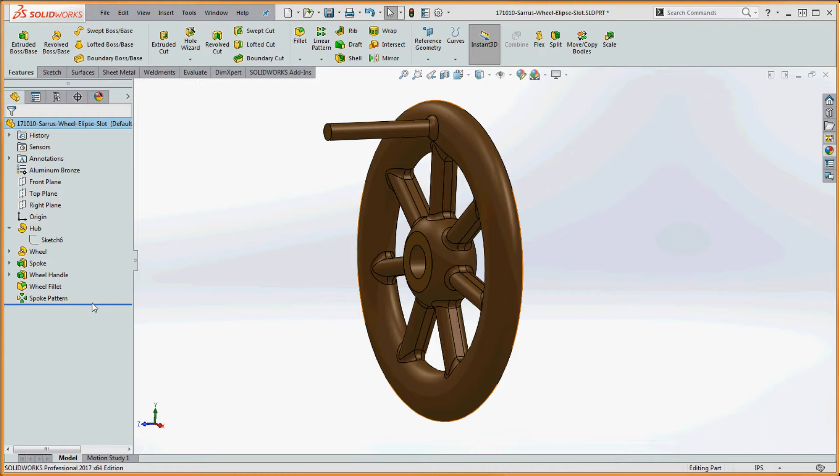So we're going to first start with the hub. Let's take a rollback bar and roll this back a little bit. You can see what we're going to be accomplishing. And if we go to the very top, actually, we're going to be choosing aluminum bronze for this as a material because it kind of looks pretty. And the hub's going to be this feature over here, this sketch over here. We're just going to revolve it around that center line right in the right plane.

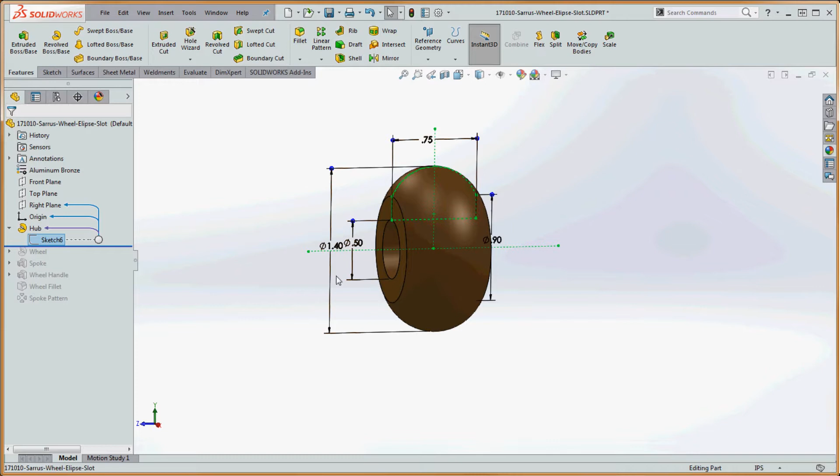So we're going to go ahead and revolve that around, and what that's going to do is provide us with a 1/2 inch hole. It's going to be 3/4 of an inch wide, and then the top is going to be variable. We can make it 1.3, 1.4, but it kind of gives it a round look to it. So if we rebuild that, the next one's going to be a wheel.

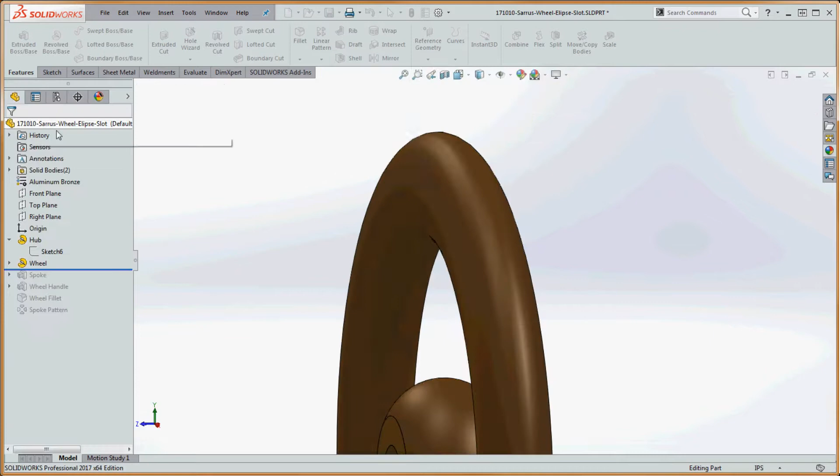So if we look at the profile of the wheel and go to the section tool and cut that in half, let's go ahead and cut it this way. What we're going to be doing is we're going to be applying an ellipse in here. That's going to help define that. So let's go ahead and get out of that and take a look at the sketch that drives that. If we right click it and go to that sketch, very basic.

It's kind of like a circle, and we're going to go to that center line that we have in the middle of this and provide a diameter on that, and that's going to give us a diameter of the donut, the torus, as we'll oftentimes call it. And this is defined by an ellipse, and if you go up to the sketch tab on Command Manager, we're looking at this element in here.

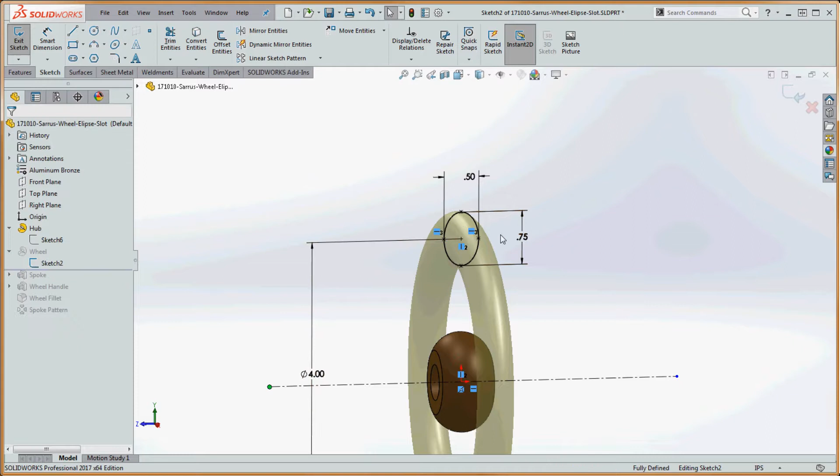So the way this works is you define the center of that ellipse, you sketch it out in one direction, you sketch it out in the other direction, and you apply various dimensions on it. So the 3/4 inch dimension, which means it's half as much longer than the 1/2 inch dimension here. Plus you have to do something extra, so it gives you these points in here. You have to define these points too before it comes fully defined. So these 2 points are going to be horizontal to each other. And that'll define that ellipse, and we're just going to go ahead and rotate that around.

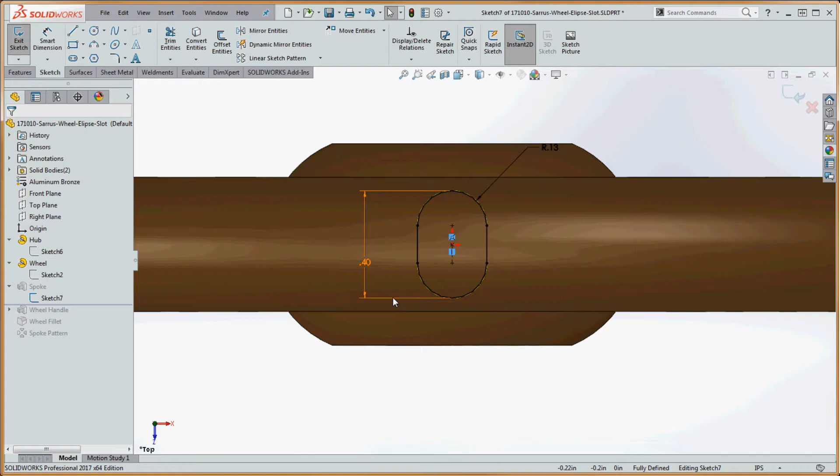The next one is going to be the spoke. And this will be kind of interesting. What we're going to be using here is the slot tool. So if we right click on sketch 7 and go normal to that and see what that looks like, we're going to be sketching out a line in here, and on that line there's going to be an offset for the edge of that slot. We'll talk about that a little bit more, but the length of the slot is going to be 0.4 inches, and the radius of this portion of the slot up here is going to be 0.13 inches.

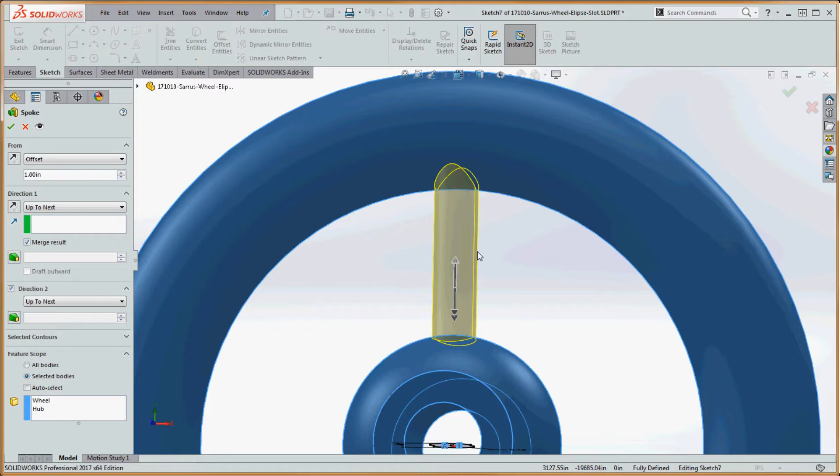And then one interesting thing we're going to be doing is when we go to the feature on that one, which is going to be an extrude, we're going to do an offset in that. So the first offset is going to be right here in the middle, and it's going to be 1 inch. So now we have kind of a virtual sketch in here. And we're going to be telling it to go up to next, which is going to be the torus up here. And then direction number 2 is going to be up to next down here too. So that virtual sketch is going to go up to that surface up here and then down to this surface.

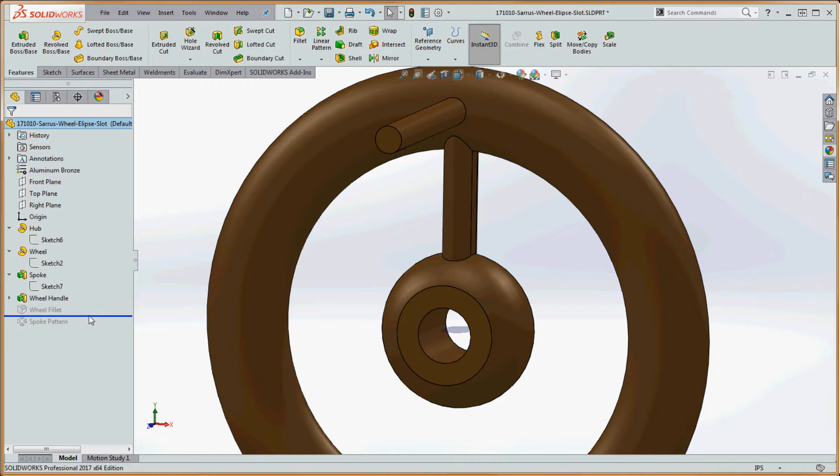Now we're going to do the wheel handle, and that's pretty basic. That just comes out like that. We're going to be doing that for the front plane, and then we're going to put in fillets around that, and then finally we're going to end this with a circular pattern. We're going to do 6 of these spokes with the fillets, and we're going to make that go all the way around our wheel.

Okay, so let's start with the hub. Let's take our rollback bar and roll that all the way back as far as we can go. We can't go any further than the origin, so we can delete all the stuff that we like.

We're going to be sketching on the right plane. We'll do this pretty quick, going normal to that plane, and put in some lines.

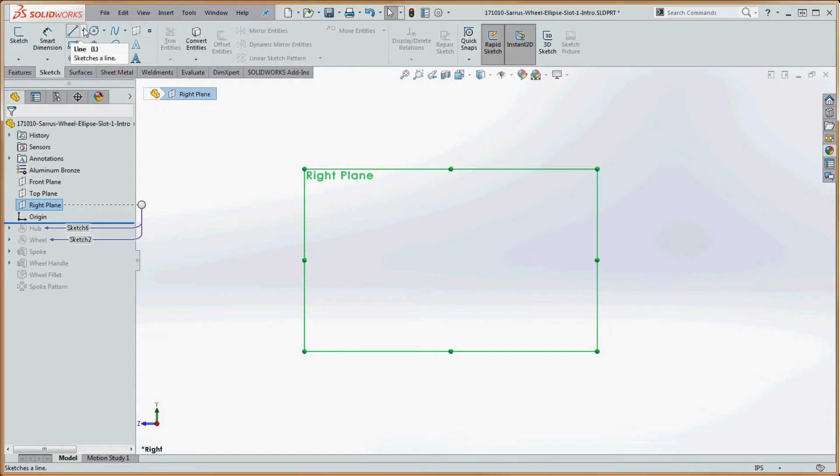Go to the sketch tab on the Command Manager. For the center line, we're going to sketch it horizontally and then vertically. We'll choose the midpoint of that center line and make a coincident relationship with the origin, then sketch that out a little bit.

This time we're going to make a center line and just have it go up. We're going to put all of our model geometry on top here. So the first thing we want to do is put a line in here.

There's another way of doing this line too. Since we're going to be providing a midpoint relationship here, let's go ahead and use a midpoint line and sketch that out. Sometimes it's hard to pick up that horizontal relationship, but yeah, there it goes.

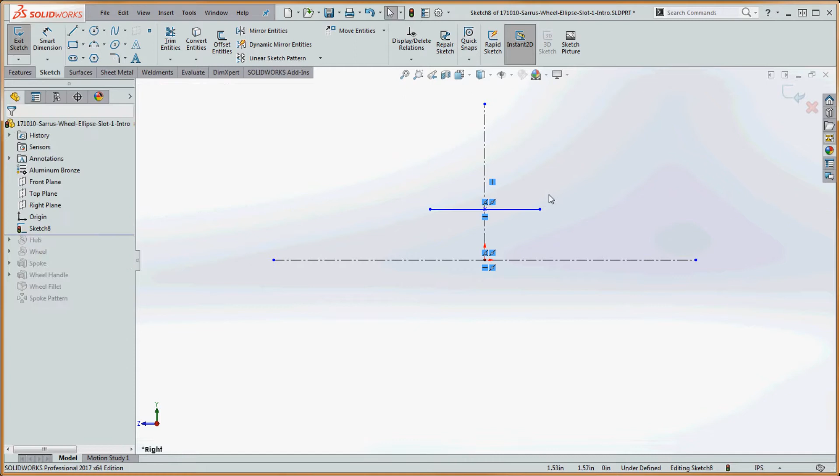We're going to provide a dimension between that line and the center line, and make that a half inch. Right now it's like 2 inches, but 0.5 is going to scale the lines we have in here, which actually makes that turn out okay.

Then we're going to provide a width, so we'll put a 3/4 inch dimension on that. That kind of gives us an idea of what this is going to look like.

We're going to put some connected lines and an arc across the top, another connected line down here, and this is going to be the void where the hole is going to be. It's a little bit of a different way of thinking about this.

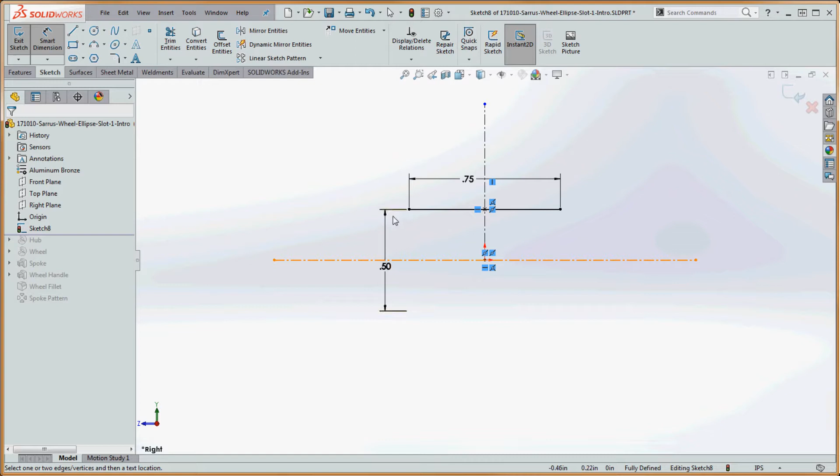But if you think about this dimension, if we click on it, go over here to Leaders. Remember, we can go back and forth between radius and diameter, and right here in this situation, this is actually going to be the diameter dimension of that hole we're going to create.

Green check mark. Let's go ahead and put a line in here and maybe go up a little bit. Let's go ahead and take that line.

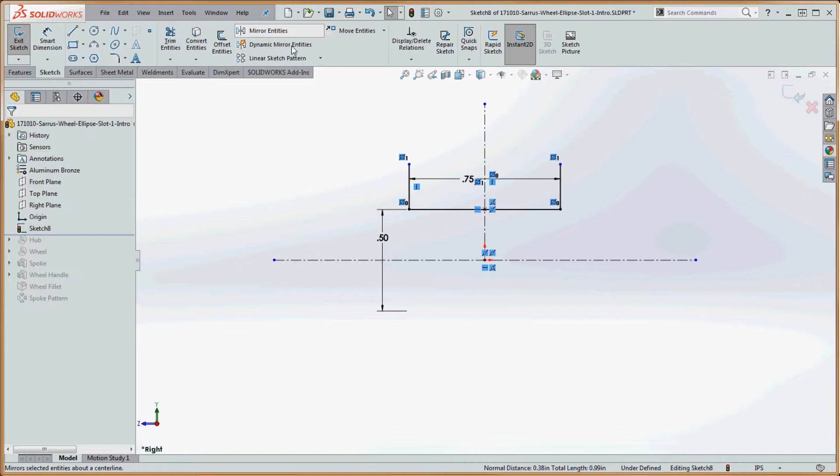We're going to mirror it to the other side. So click those two items, the center line and that line, and it's going to go to the other side. Let's go ahead and put an arc all the way across.

Now this time we're going to put a dimension between that arc and this line, and go to diameter down here, or we can go to radius. Let's go to diameter and just drop that in there at an arbitrary value.

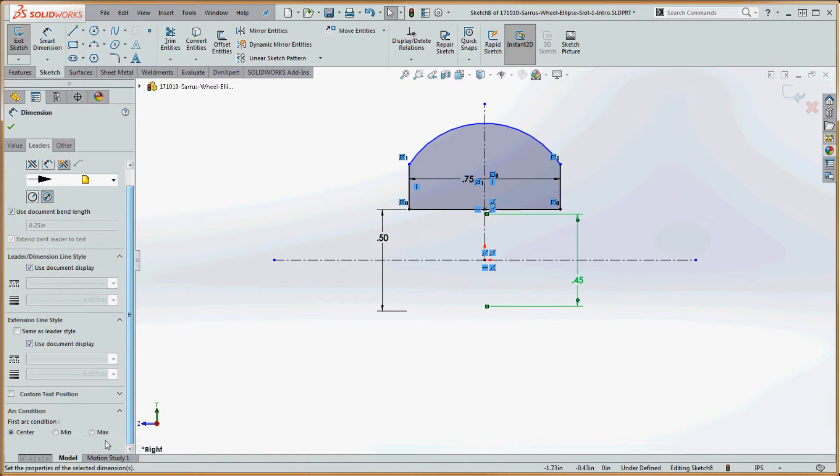We're going to click on it, go back to Leaders on that, and make that a maximum, going from the very top of the arc down to the bottom, so it's going to be the diameter of that. Let's go ahead and make that maybe 1.4.

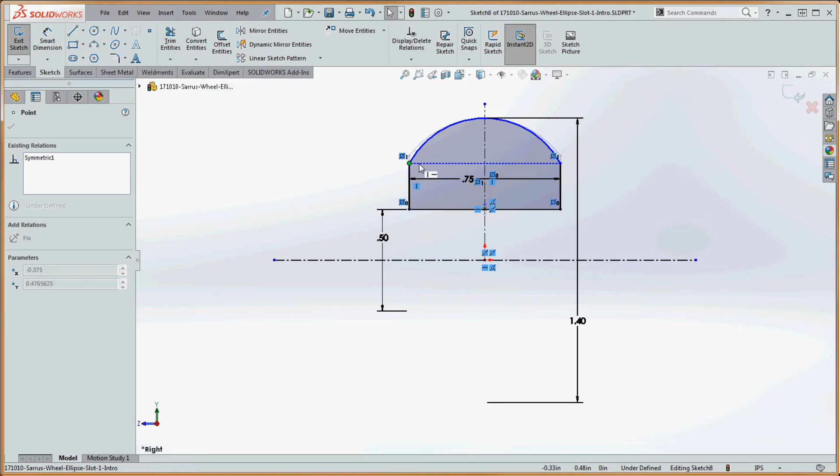So let's go ahead and go to Smart Dimension. Let's go ahead and dimension that at maybe 0.2, kind of making that an exaggerated arc in here.

Let's go ahead and go right to our features. If we go to Feature tab, Revolved Boss Base, I think it's almost ready to go. We're going to go 360 degrees.

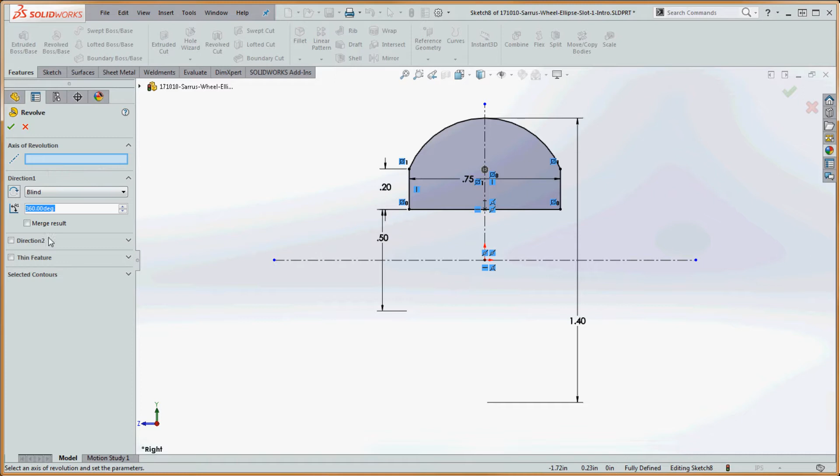We're going to select all the default settings. What I was looking for here is the axis of revolution. If we click on that, now you can see what that's going to look like.

And green check mark, and now we have our hub in place. So let's go ahead and rename that from Revolve 1. Let's go ahead and call that our hub.

Now, we already have a feature in here called hub. So here's a little trick. It's not going to let us do that. It's not going to let us name it the same name. But if you type in hub and maybe space a couple times, now we get it.

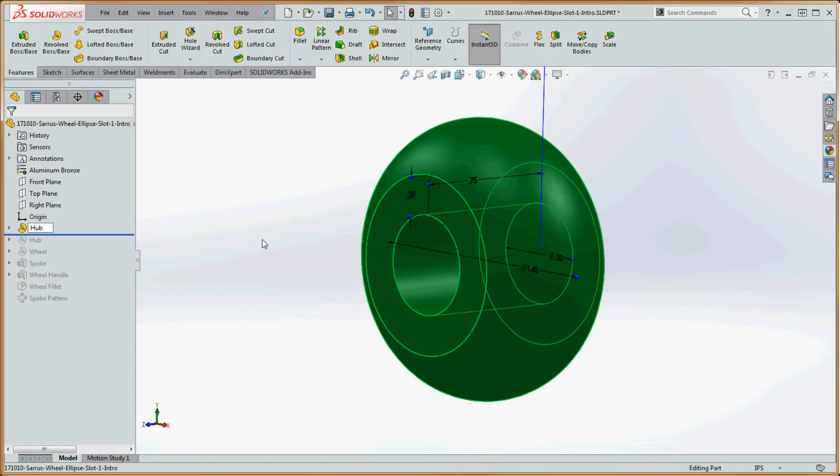Okay, so let's continue on. Let's go ahead and use the ellipse. We're going to put in the wheel portion of this, or the torus, as it might be called.

So let's go ahead and choose the right plane. Let's go ahead and make that normal to. If we were to right-click on it, we have that normal to function in here. So we can see where we're going to be sketching.

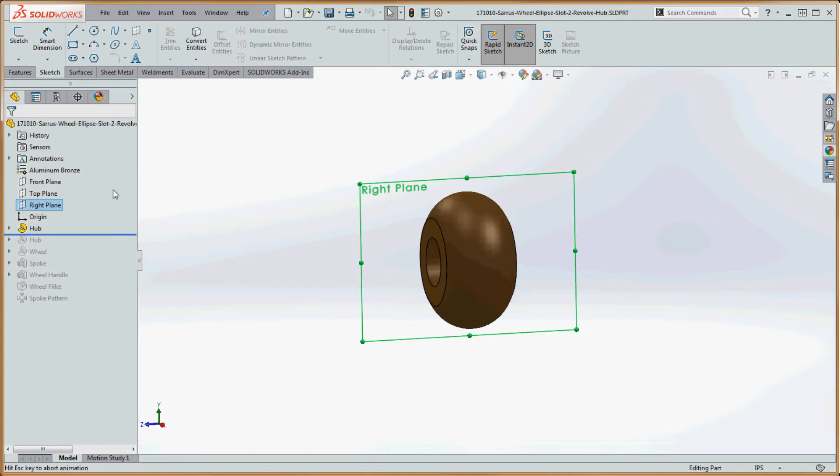What we're going to do is we're going to sketch an ellipse out here, 4 inches from the center down here, that center line which is going to go down here horizontally. And then we're going to revolve that around.

So let's do this. Let's go up to our Sketch tab. Let's go to center line, and we're going to go ahead and choose the right plane for that. And we're just going to sketch a center line right down the middle of that.

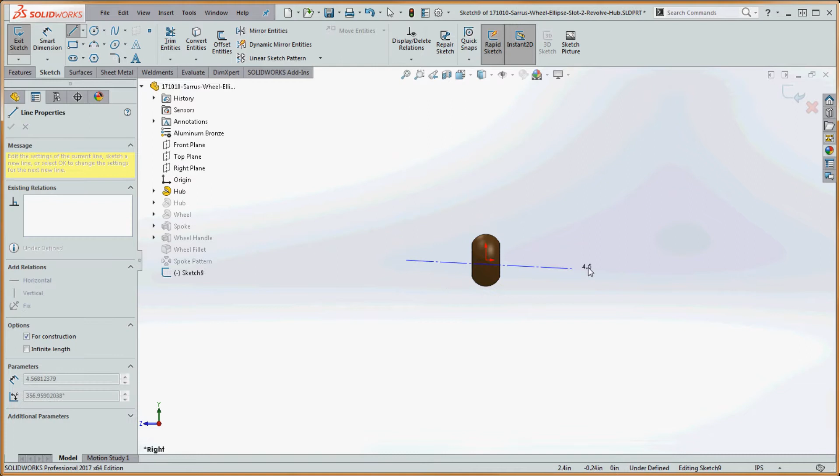Right click on that, select midpoint, and then that point we're going to make that coincident. And then we're going to, I don't think we need a vertical center line, but just for good measure, let's go ahead and put that in too, because we might be able to use geometry from that.

So now with the Sketch tab open, let's go ahead and go to Ellipse, and let's go ahead and sketch that out. So we can put it right in that center line. And we can sketch it out.

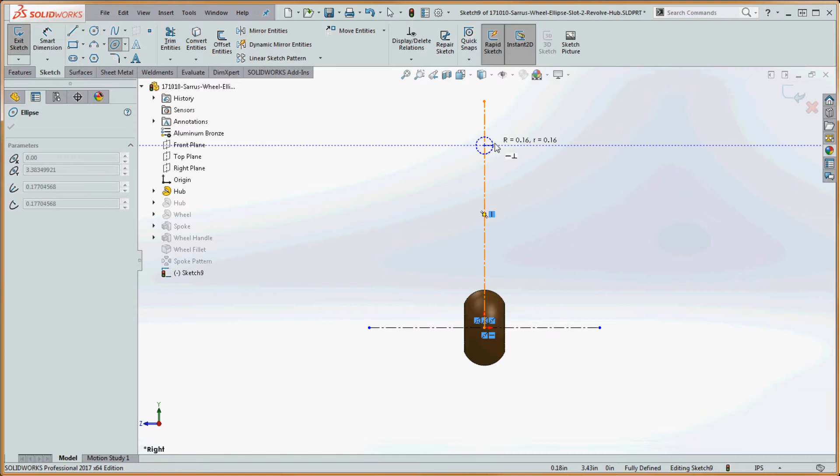You know, it starts out kind of like a circle. We're going to define one end of that circle, and then we're going to define the other end of that circle and kind of make it appear like that.

Might want to, since these 2 points are not really on that ellipse, if we go ahead and park one of those points in there, it's going to create a coincident relationship. That kind of helps lock that into place. And I don't think we really needed to do it up there, but we have another coincident relationship up there too.

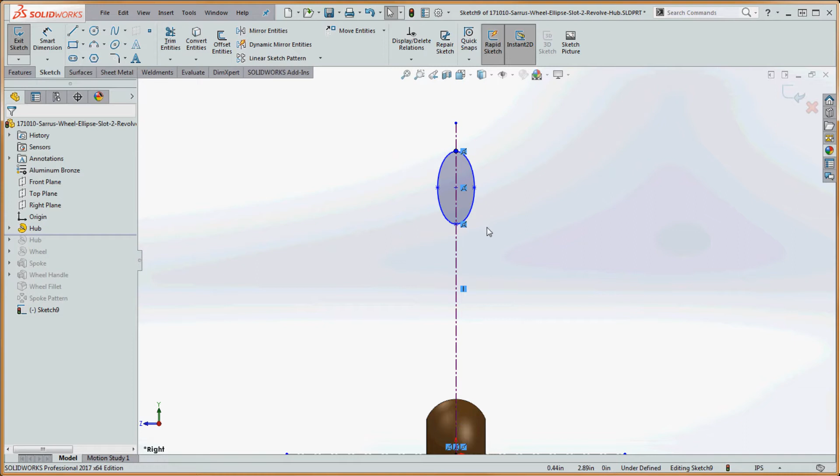Another way of doing this, it's just very simply just taking 2 points in here and making those either horizontal or vertical, and that helps define that too.

So let's take the center point of that ellipse, and let's go to that line which goes right through our center here, and let's go ahead and grab the diameter of that by going over that center line. We're going to make that 4 inches.

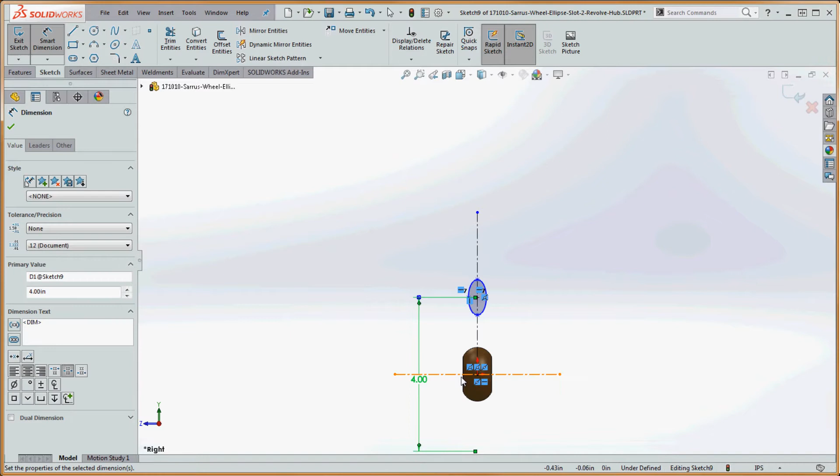So now we're going to go ahead and put in some dimensions between these 2 points. We're going to make that a 1/2 inch. And between this point, the top point, and the bottom point of that ellipse, we're going to make that 3/4 inch. If you do that, now you can see it's fully defined.

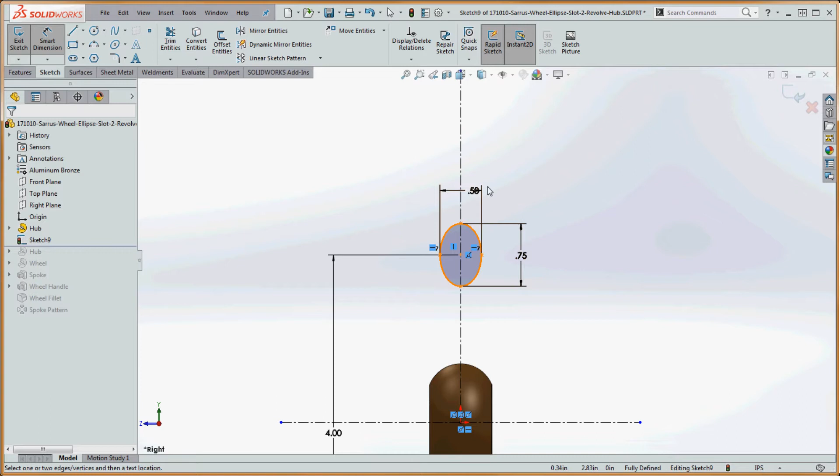It's fully defined because we defined 2 of these points as being horizontal. We have a length and width dimension up here, considering those points on the ellipse. And the ellipse's position with the origin down here, we provided that there too.

So now let's go ahead and finish this. If we go to Features, Revolved Boss/Base, asking for an axis of revolution. We're not going to go to any other options in here. And now we have that in place.

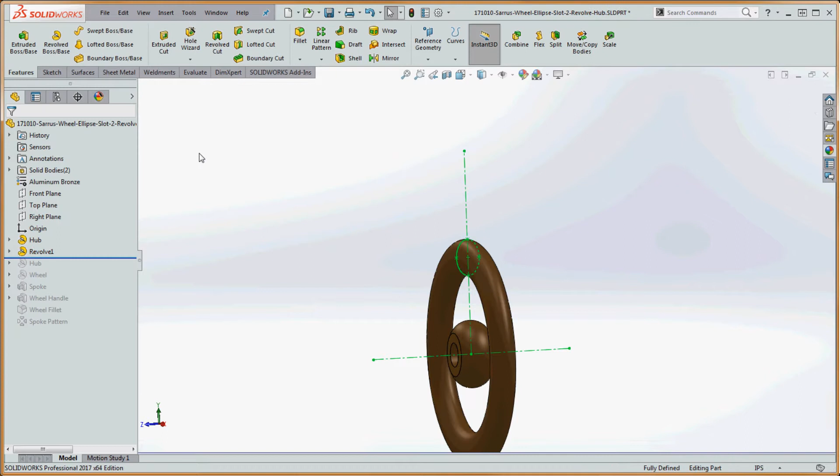If we go to the green check mark, bang. Now we have the rings of Saturn.

So let's go ahead and rename this. We're going to be calling this our wheel. And just like last time, put in a couple spaces in there and allows us to rename those features with the same name.

Okay, so let's put in a spoke. This is a little tricky, but you know, it actually makes a whole lot of sense to do this. The desire here might be to put in some reference geometry and then sketch from that plane, perhaps a plane in the middle of this, and then extrude up and then extrude down to the next surface or the next.

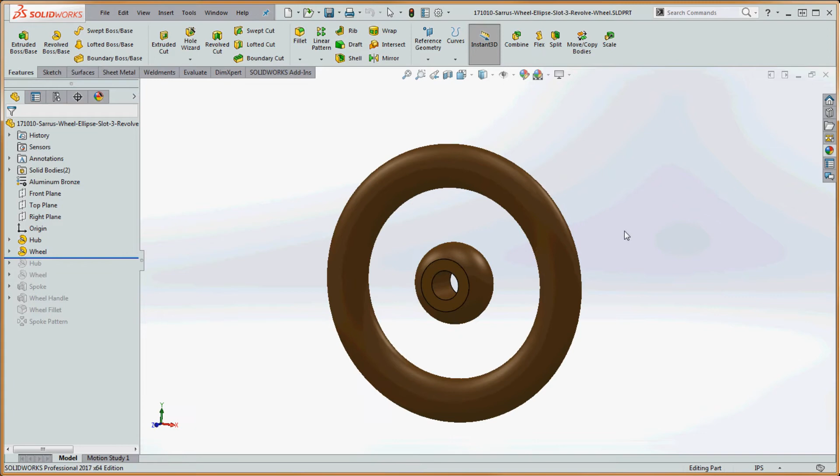But we could do this simply by using the planes that we already have. So if you go to the top plane and go to Sketch, and let's go ahead and right click on that top plane and make it normal to, and let's see what we're going to be doing.

We're going to go up here to our slot tool. We're not going to go into a whole lot of detail about slot tools, but let me show you the first one up here, which is going to be our straight slot, or Centerpoint Straight Slot. Let's go ahead and choose that one, but they're all very similar.

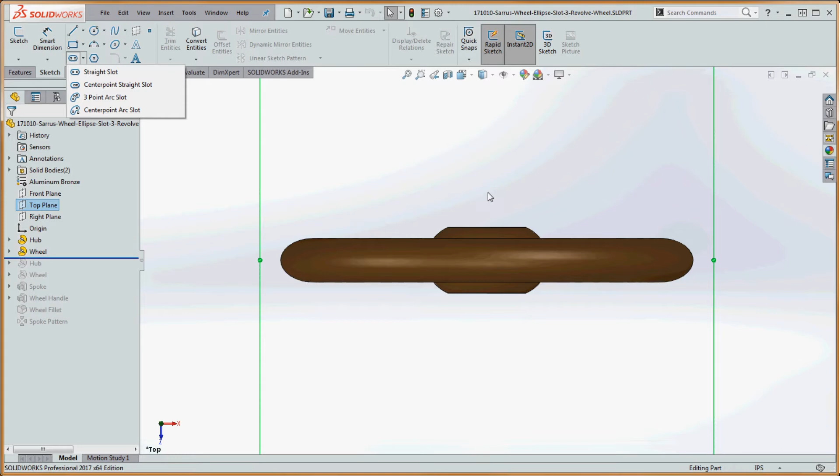They have different variations in regard to how they come out. Straight slot allows us to make a slot from one point to another point, and then we define the width or radius of that slot. Centerpoint slot allows us to start from the very center, like maybe the origin, and sketch that up in one direction. The third item is kind of like the ellipse, where you go off in one direction and the other direction. A 3-point arc slot is just like the 3-point arc, and the Centerpoint arc slot is just like the Centerpoint arc, so it sketches out in a very similar manner.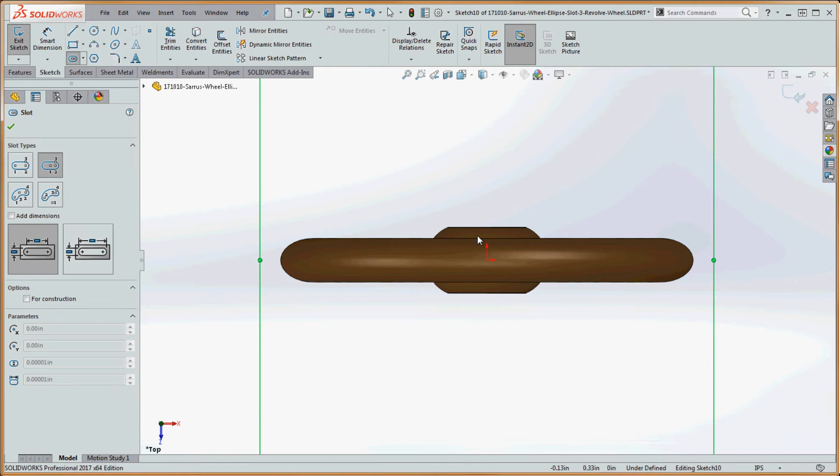So let's do Centerpoint Straight Slot. Now the origin appears, and we're going to sketch that up here a little bit, trying not to pick up any other relationships besides a coincident with the origin and a vertical relationship. Then we're going to sketch that out. Now we have that slot in place.

There's a lot of flexibility with the slot. We have a vertical line relationship on that line, so we won't be able to rotate that. But let's go ahead and put a dimension in here, between this arc and that arc, out to the side, with kind of an arbitrary value.

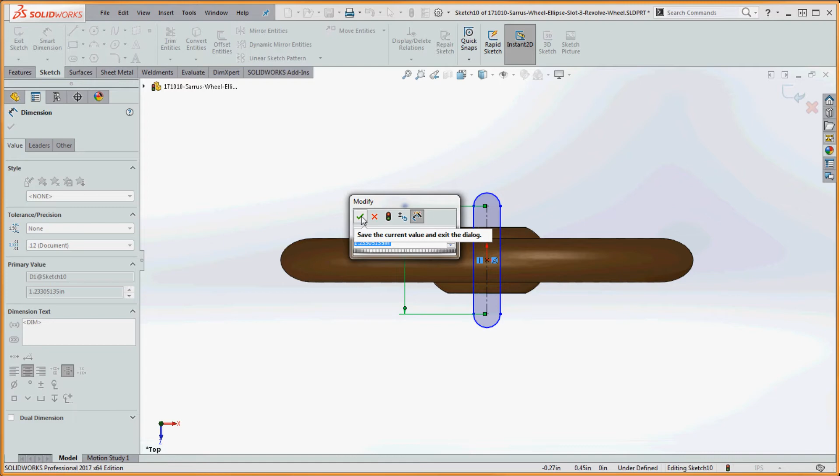But what we want to do with that dimension, if we go to the green check mark, click on the dimension line, go to leaders, we're going to make sure we're doing maximum on one condition, and maximum condition over here. Now we want that ultimately to be 1.4, so if we double click on that, or 0.14.

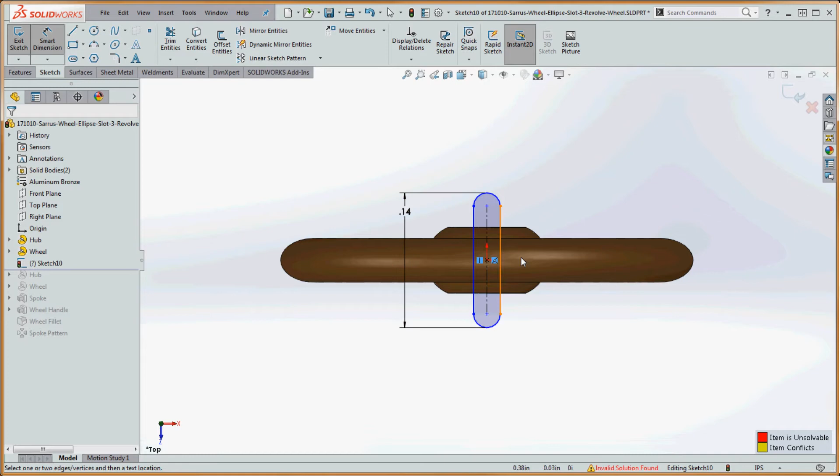Now it gives us that slot, I think. Well, let's try maybe 0.5 and see what that looks like. Yeah, we don't want to quite go out the full width of that. We want it a little bit less than the full width of the ellipse that defines the wheel. So how about we make that 0.4. Now it looks almost like a circle in here, but we're going to go ahead and crack that.

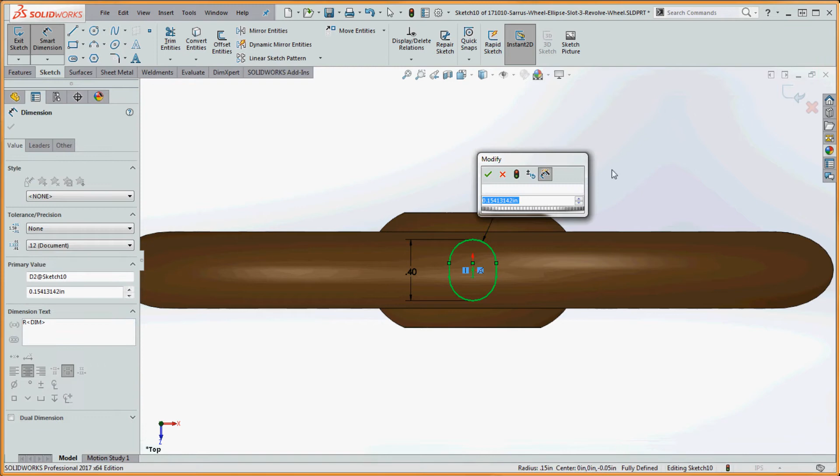We're going to go ahead and put a dimension here, and make that 0.13. So with those two dimensions defined, and those two sketch relationships—the coincident relationship with the origin, and the vertical relationship with that line—that defines the very center of that slot: 0.4 inches for its width, and 0.13 for the radius up here.

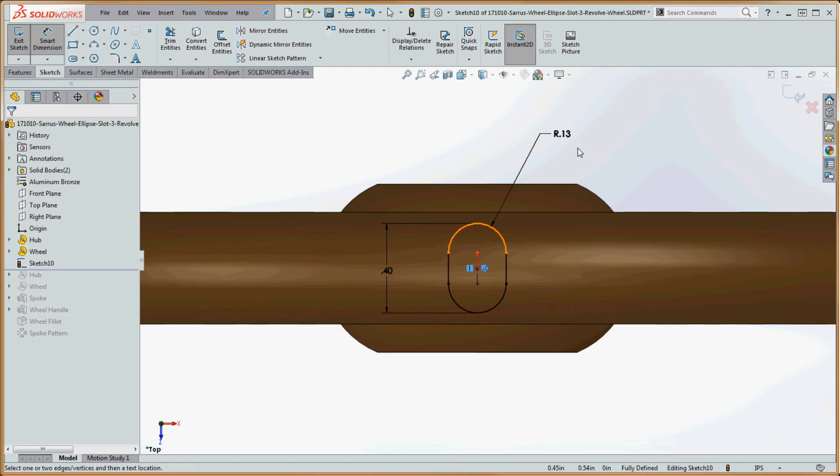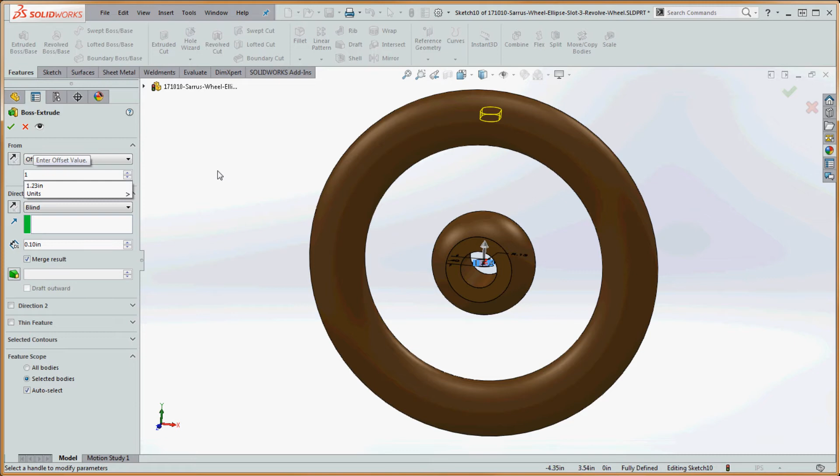Now we're ready to do something with that. Let's go up to features, go to Extruded Boss/Base, and we're going to start from the very top. Instead of from the sketch plane where it is right now, we're going to do offset. Let's go ahead and offset maybe 2 inches, because we know that's 2 inches in diameter. If we go to 2, that's a little bit too much—1 inch, because we have to think radius here, not diameter. So if we go to 1 inch, now you can see it's going to be extruding up in that direction.

So we're going to go up here to up to next, and now it's going to go up to the wheel. We could also go up to surface and define that up here, but that may not give us the intended result, because it could pick both sides. So we're going to do up to next in that one. Going down here, check direction number 2, up to next in that direction too. Pretty simple choices in here.

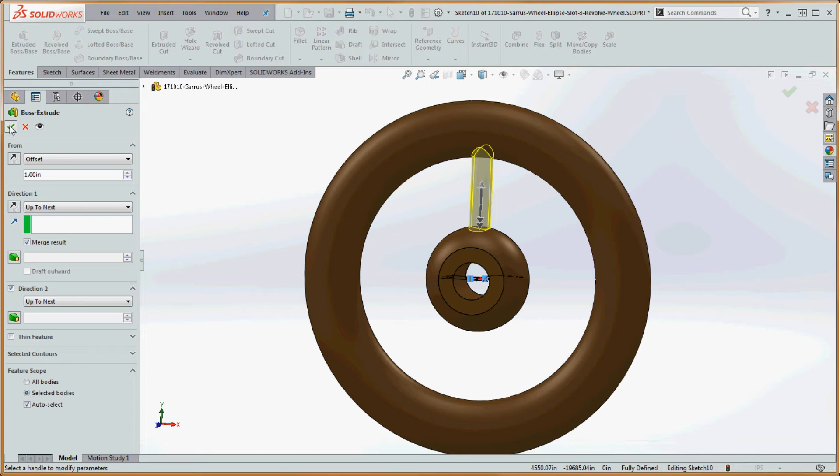And if we go to the green check mark, now we have our spoke in place. So let's go ahead and rename that from Boss Extrude, and we're going to call that Spoke, with a couple spaces in there.

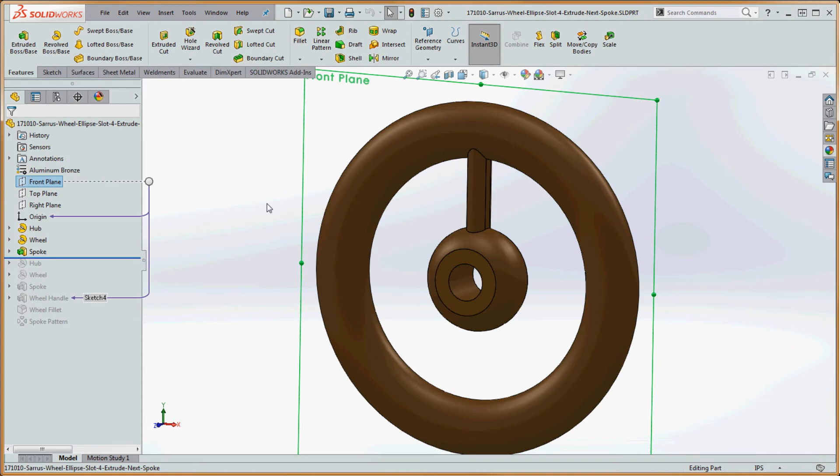Alright, the next item on our list is the wheel handle. Very simple. We're just going to go to the front plane up here. We're going to sketch out a circle on that. So let's go normal to it. If we right click on that front plane, we can go normal to it, and we're going to go to sketch. We're going to do a circle.

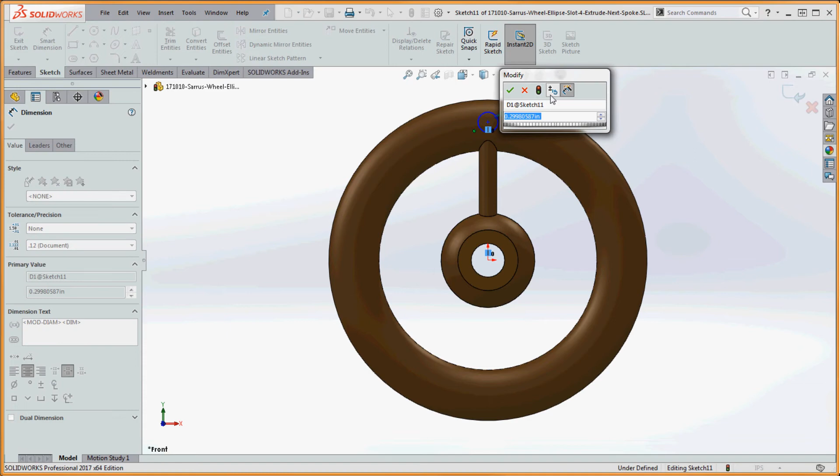We're going to try to pick up an implied relationship with the origin down here. So if we click inside of that circle and the origin itself, we can make those vertical. We're going to put a dimension on that of 1/4 of an inch, 0.25. And now we have to define a distance between that and the origin. So if you click on that circle and the origin itself, and if we put in a horizontal center line down here, we could do the diameter in that. But I think if we just click on 2 here, that'll allow us to do that.

So very simply, go to Features, extrude boss base. We're going to kind of pull that out. What we want to do is pull that out about 2 inches. And if we pull that out right there in the 2, you can confirm that over here by putting that into the Properties Manager. You can take this arrow and actually pick values in here. So, don't see 2 in there right now.

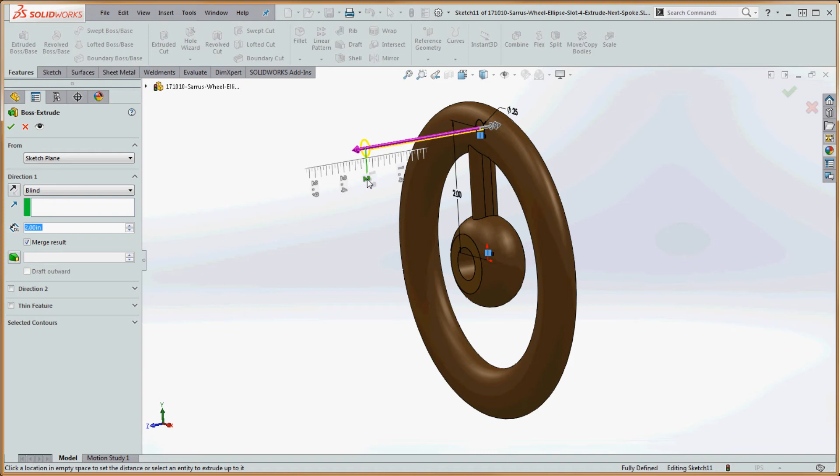There it is. And we can confirm that over here by going over to our Properties Manager and making sure that that's 2. Once we do that, go to the green check mark. And now we have our wheel handle. So let's go ahead and rename that. And now we're all set with that.

Okay, so from the wheel handle and our spoke that we have in place, let's go ahead and put in a fillet. So it's going to be a feature fillet. We want to make sure that the handle has a fillet on that too, but we want to do that before we do our revolve feature. So let's go to fillet. And 1/10 of an inch sounds good to me. You want to make sure that you choose constant size fillet.

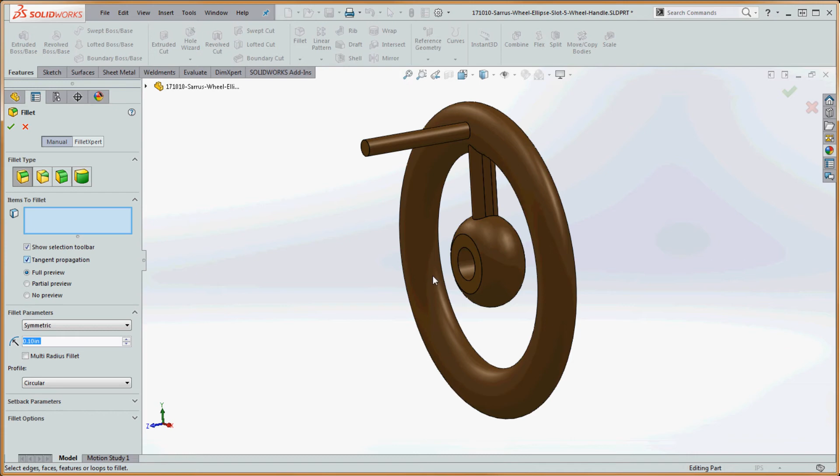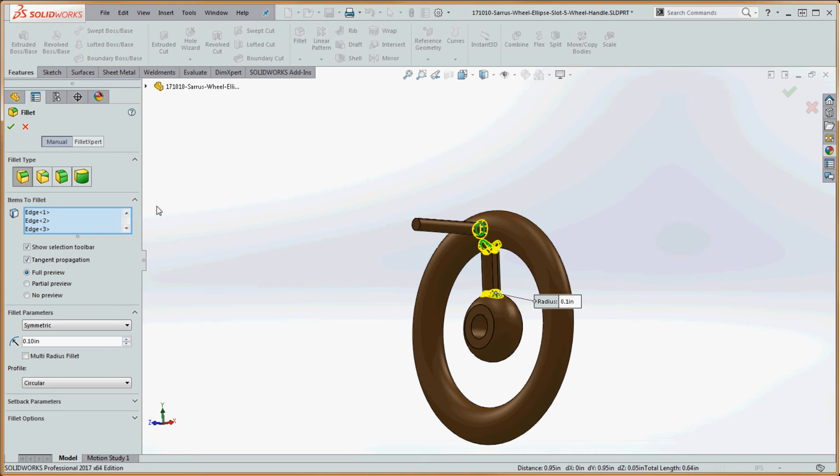And you also want to make sure we have tangent propagation in here. So that way when we choose an edge in here like this, it propagates right around it, anything that might be tangent to it. Same thing as up here. We don't necessarily have to choose anything flat, but anything close up there. And then the same feature, we're going to put that on the wheel handle itself. Once we do that, we should have 3 items selected in here, edge 1, edge 2, and edge 3. Go to the green check mark.

Bang! Now we have it in place. So let's go ahead and call that our wheel fillet. So slowly click inside of that, and then we're going to add our name to it. A couple spaces after that too.

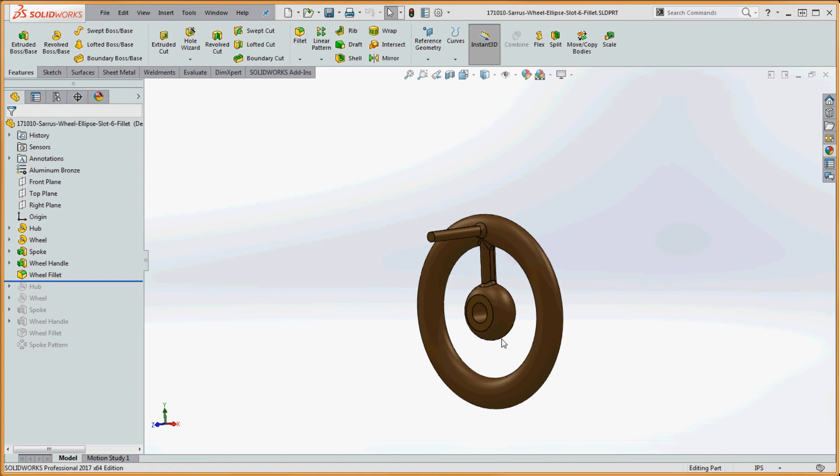Okay, so now that we have our spoke and our fillets associated with the spoke and the handle up here, let's go ahead and do a circular feature pattern with this. We're going to scoot in a little bit. So let's just jump up here to features. Let's go to linear pattern and go to the arrow that defines that a little bit. We're going to scroll down to these other options in here. We're going to choose circular pattern.

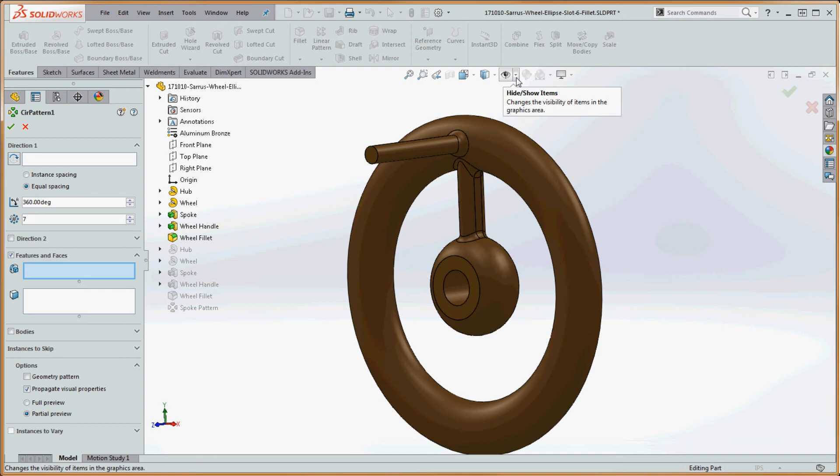And direction, it's asking for some sort of axis or some sort of line that would define an axis. We don't really have anything visible here. So let's go up here to this button called Hide Show Items. We're going to take that arrow and pull that down. This is on our Heads Up View toolbar. It's this item that's 2 over and 1 down called View Temporary Axes. So what that does is that anything that's circular is going to have an axis to it.

Of course, we have an axis down here in the middle of our hub. We also have a couple axes up here too in regard to what looks like a feature fillet as part of our slot. And we have an axis up here in our wheel handle. So what we want to do is choose this axis for our hub, and there's more than one axis down here too.

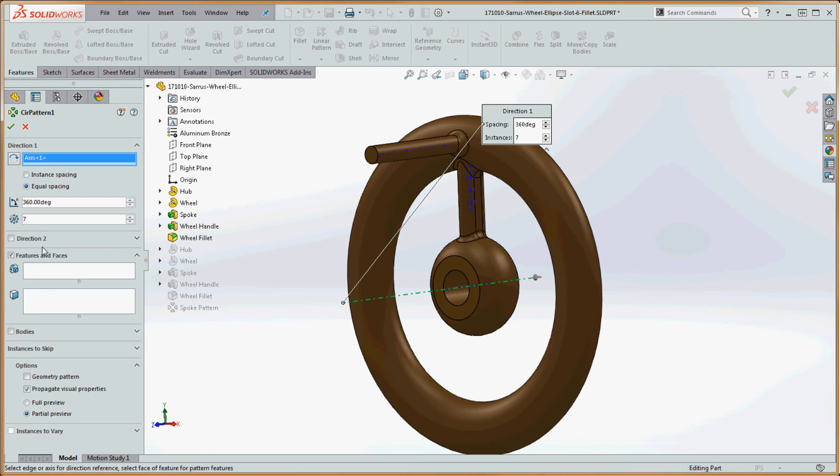So there's probably an axis for another feature in here too, because it looks like they're kind of stacked. But we're going to go ahead and choose that. And we're going to do 360 degrees around, maybe 7 or 8 instances. So we're going to go ahead and choose 7 just because it's kind of an odd number. It's a prime number. And for features and faces, we want to be able to choose the spoke.

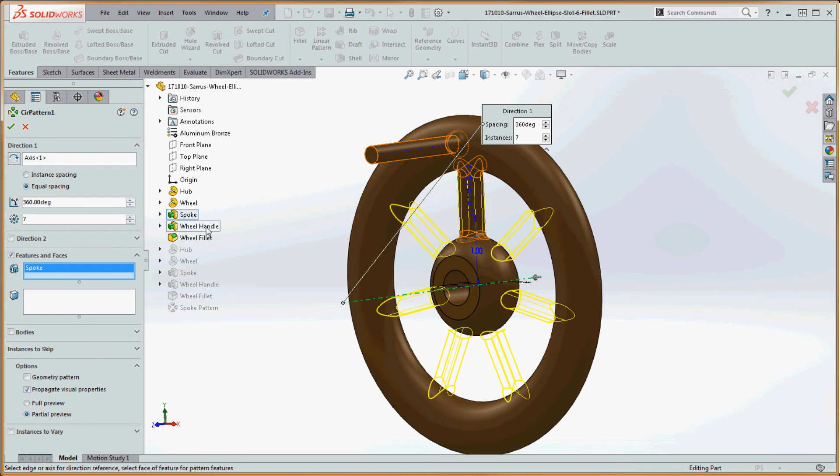We're going to make sure we go in here and make sure that it's lit up in light blue. It's our selection box in our graphics area. So when we choose spoke, you can see the selection there and how it's going to resolve itself through the graphics area. We don't want to do wheel handle necessarily, but we could do the wheel fillet.

Now you can see the preview of the fillet. And the fillet looks like it's going all the way around. It's going to give us kind of a funky outcome. But because the fillet's not going to resolve, it's probably not going to do that for us. So if we stick with all the other default settings in here and just go to the green check mark, bing, now we have it in place.

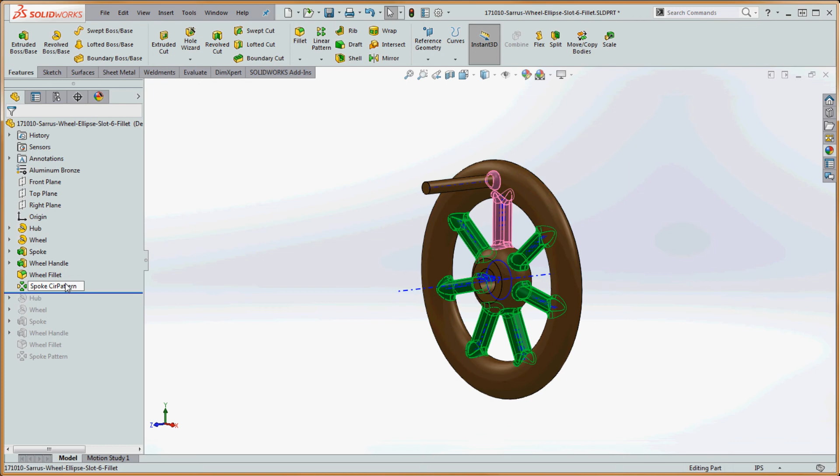So let's go ahead and rename that circular pattern to something that's a little bit more descriptive. Spoke pattern. Sounds good. And a couple spaces there too.

Okay, so let's do a little bit of a model cleanup. I'm going to take my rollback bar and roll back the hub in here, and it looks like no apparent change in here, but we're going to go ahead and delete that. And watch, this is a nice little trick. We're going to delete just about all the child features that came with that. So delete child features, which is going to include the wheel fillet, the wheel handle, the spoke, and the spoke pattern, all below the bar down here.

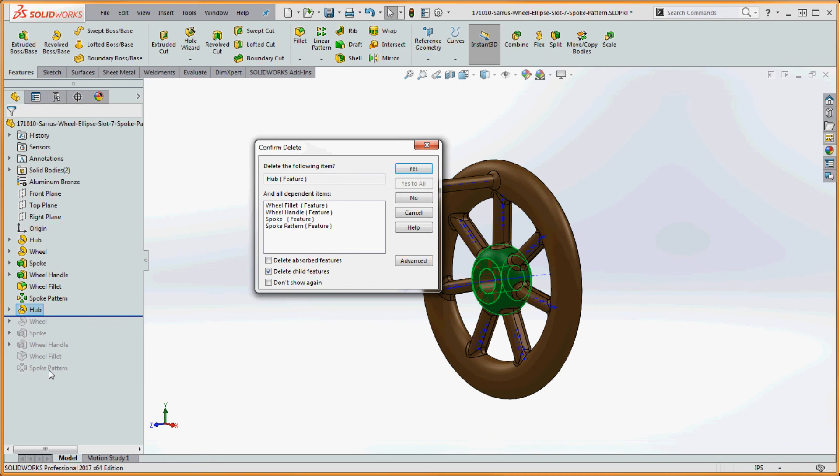The spoke pattern's going to go, but there's some things missing here. Might be a little bit more cleanup, but let's go ahead and do yes and see what we got. So we have our sketches in here. We also have a wheel in here too. So we're going to right click on that sketch. We're going to go ahead and delete that. Delete our wheel, the old wheel. It doesn't give us an option for delete child features because they're not really there.

Then these last 2 sketches, if we right click on those, go ahead and delete, we can delete those too. One at a time, or you can do yes to all. So now we have everything nice and cleaned up in our feature manager tree. We have our wheel in place. We can probably turn off the temporary axes since it kind of looks cluttered. It looks like we still have our axis up here. It'll probably disappear once we do our rebuild, which it did.

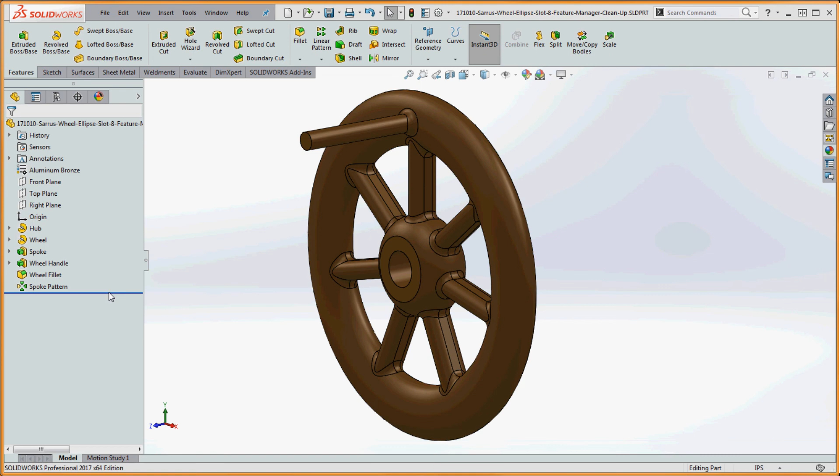Okay, to summarize, let's take a rollback and take a look at what we just did. First, we put in a hub that was a revolve feature, and if we take a look at the sketch associated with that, we just revolved that around the axis here, which is defined by that horizontal line right through the origin on the right plane. And then we went ahead and did something very similar with the wheel.

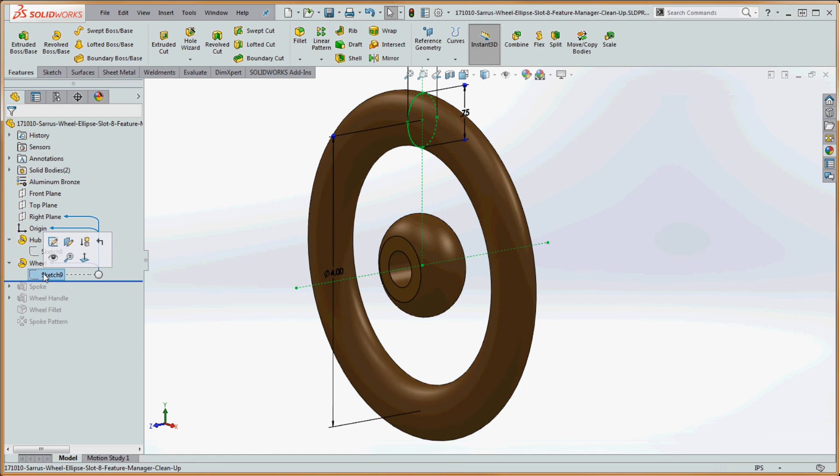So we used the right plane in that, designed an ellipse in there, put those various dimensions in there to define that. So not only do we have to define the length and width of that ellipse, we had to make sure that 2 points in there were vertical, or on that center line which came up from the origin. We also had to put a diameter dimension in there too to get that defined.

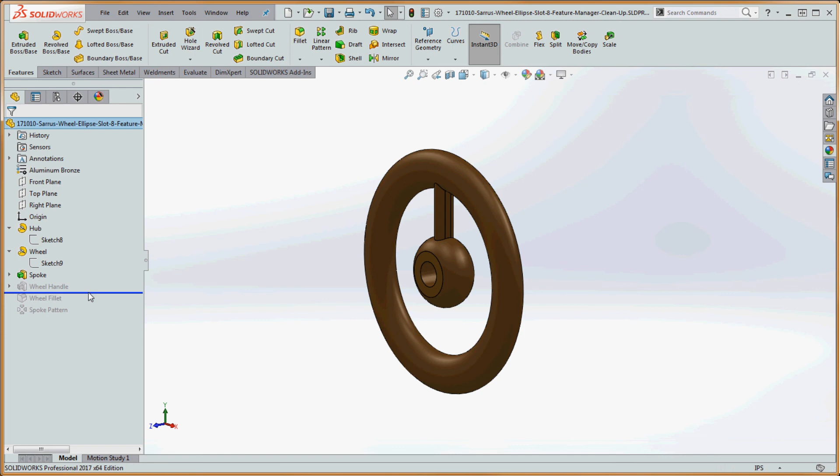Spoke, if you remember, we did an extrude. We did an offset for the from option there, and we offset to the next item up here, which is the wheel. The opposite direction we went to next, and also went back down to the hub, which put that in place. Wheel handle was independent. We put in our wheel fillet, which included the handle and the spoke, and we did a spoke pattern as a circular pattern.

And of course, all these things in parametric design could be modified. We can take our spokes and maybe do 8 of them, or 9 of them, or 6 of them if you want to do that. Everything can be modified here. So that's our wheel for our Sarrus mechanism.